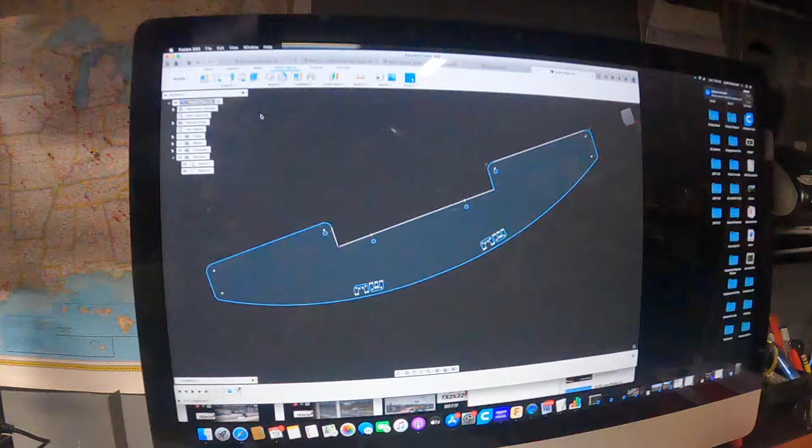So we got to make a weight plate for the Smurf. I drew this thing up, sat underneath with the tape measure - I don't know if you can see that well, I should do a screen recording but I don't want to. We're gonna send it over to my buddy Tegan, he's got some heavier plate and a decent sized plasma cutter, and we're gonna get her cut out.

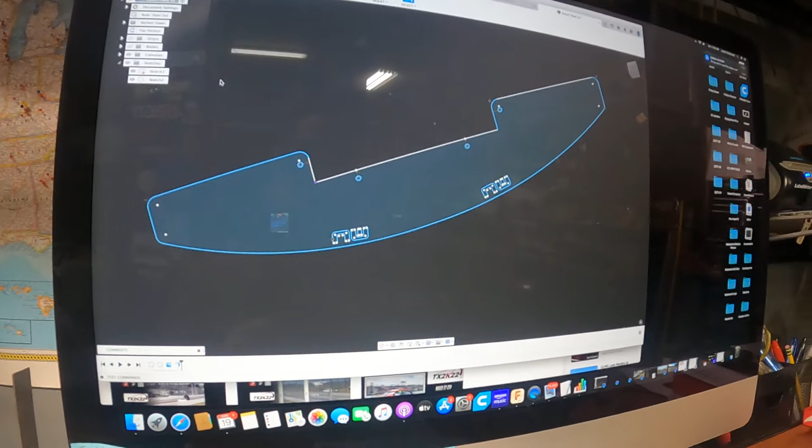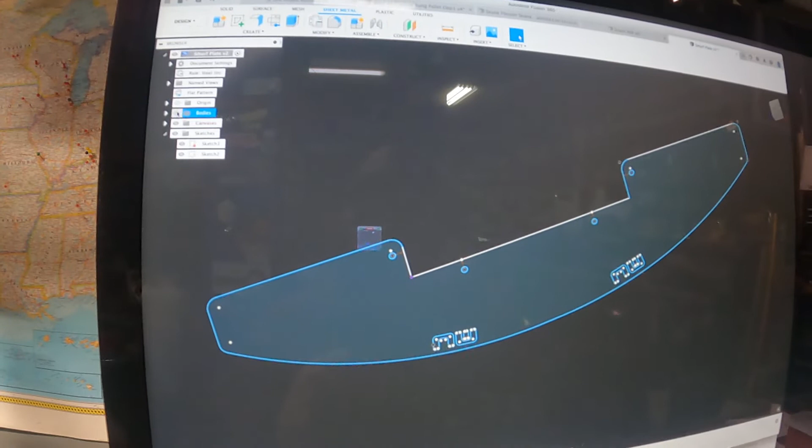So different from machining, actually working in sheet metal. I've learned that you do your drawing, you create a flange, not a solid body, and then from that you create a flat pattern, which seems pretty stupid, but once you create the flat pattern, click OK.

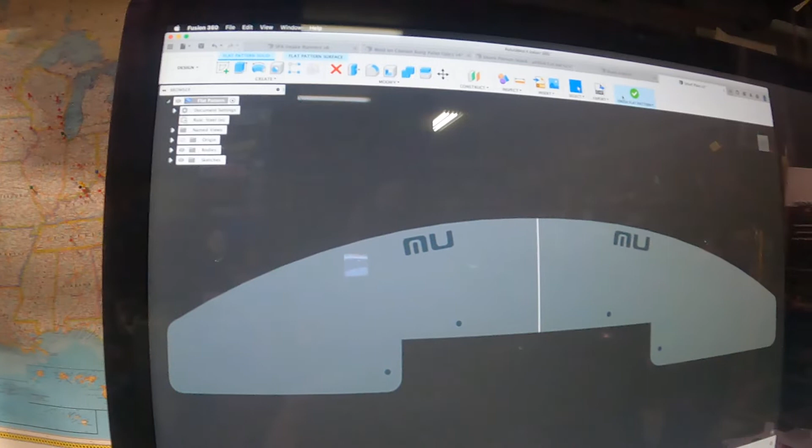This thing should pop up. Boom, flat pattern. Export in a DXF file. So I've learned if you do not do this and you do it in solids, it comes out misdimensioned when it gets to the laser cutter or the plasma cutter or whoever's cutting your sheet metal out. So export DXF right there if you're using Fusion 360. If you do it from over here, export DXF from file in there, it does not work. Anyway, I'll see you over when we get to Tegan's shop and cutting this bad boy out.

All right, so I sent those files off over to Tegan at Strife Manufacturing, and here I am. Got some people over here doing some seat work. Got my beverage.

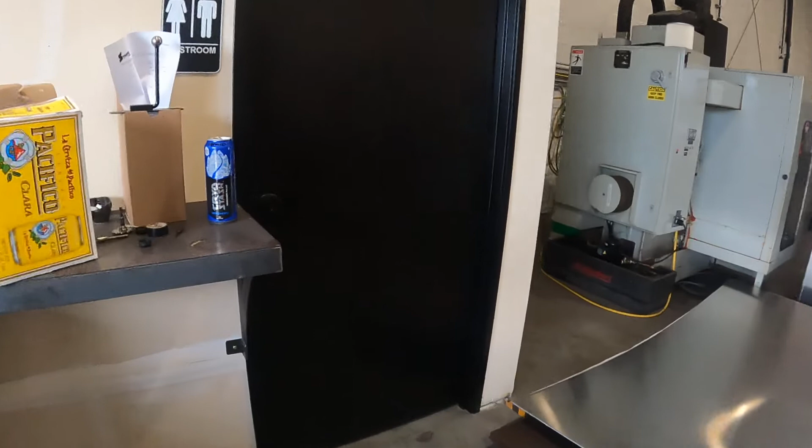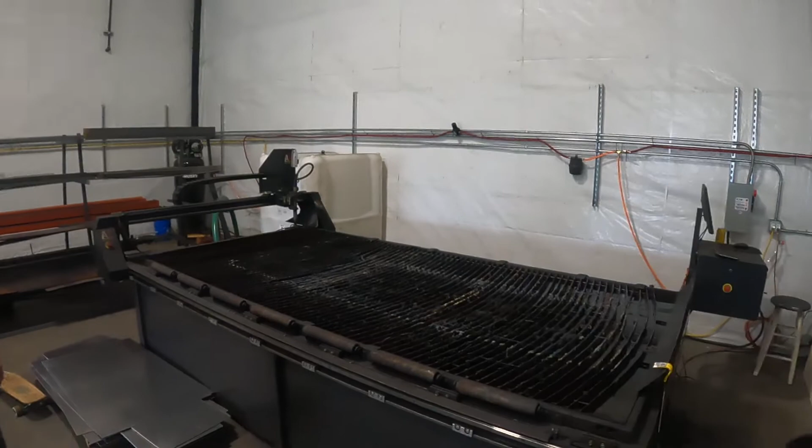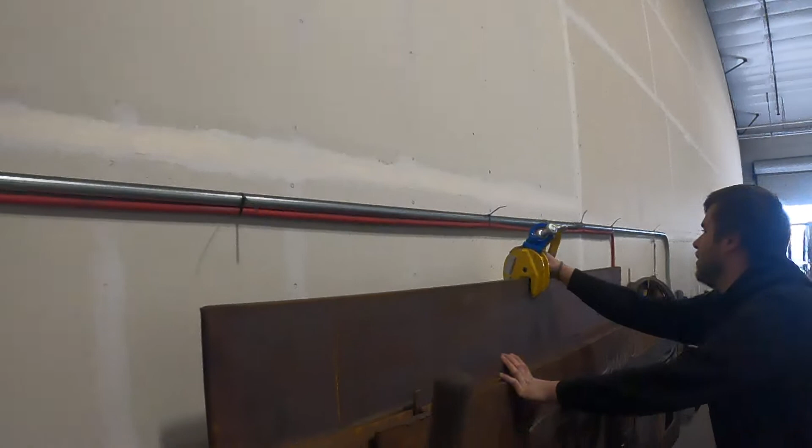All right, so Tegan picked up a plasma table, 5x10, last summer. He's been burning plate for a lot of local people lately, just tearing this thing up. I drew the files up, sent them over, and he's got some material sitting over here. We're gonna load up and get cutting on this guy.

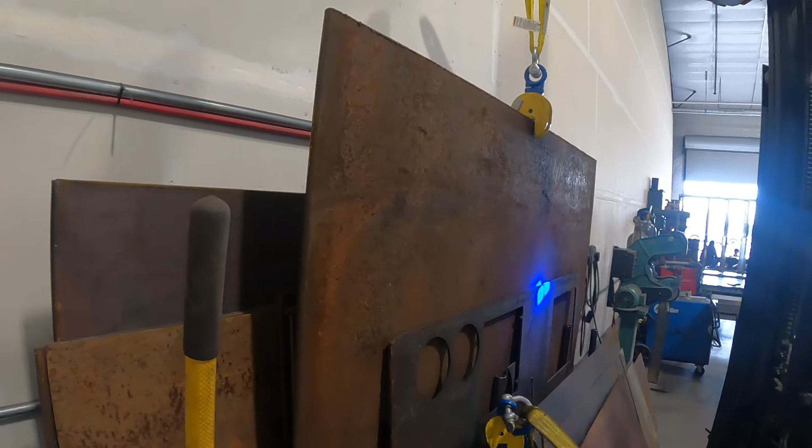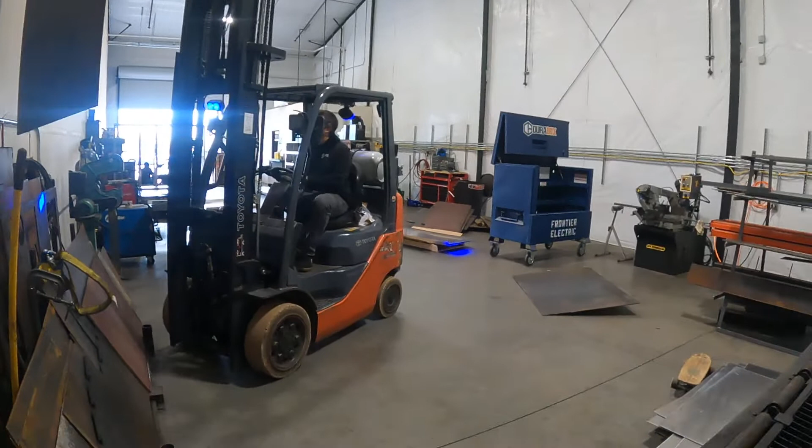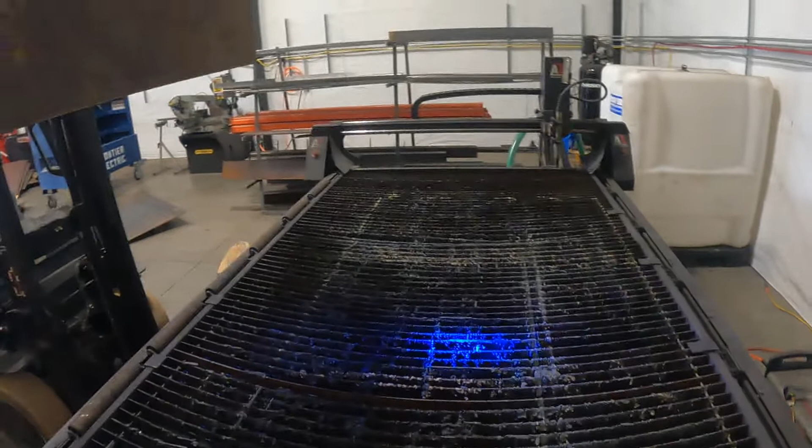Do you go far and then come back? Yep. Okay. Yeah, you might just have to square me up. Yeah. So he's got stoppers over there on that side, so he's going to come across. We'll set it down over there, and then he'll pull it backwards with the forklift.

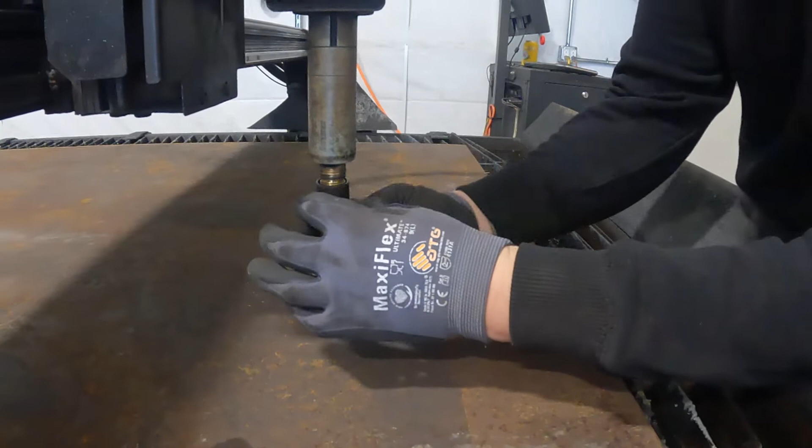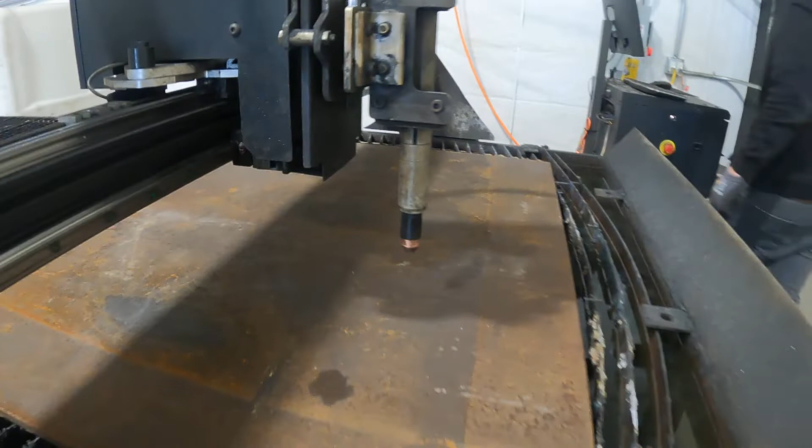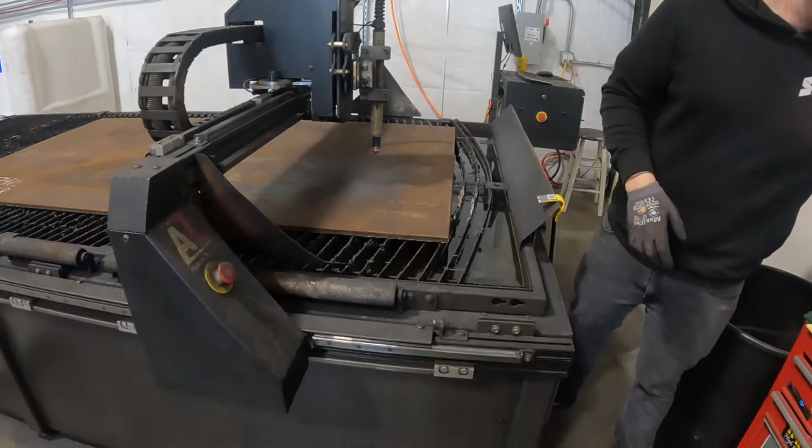Run anti-spatter on here, basically just for the arc, when it arcs. It keeps the sparks from building up on it, and your consumables will last longer.

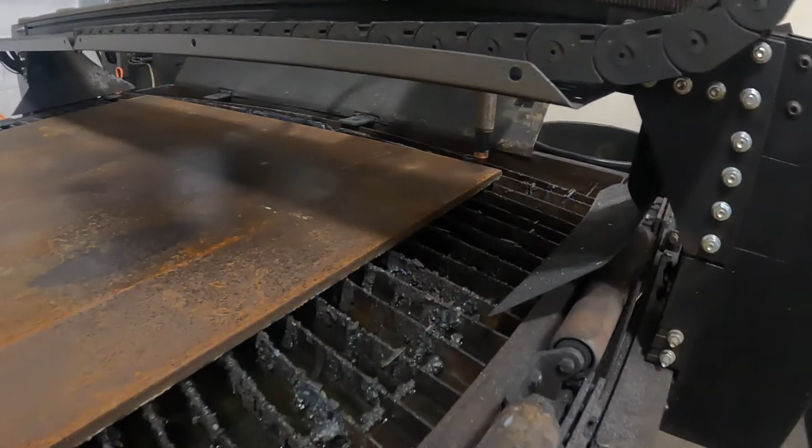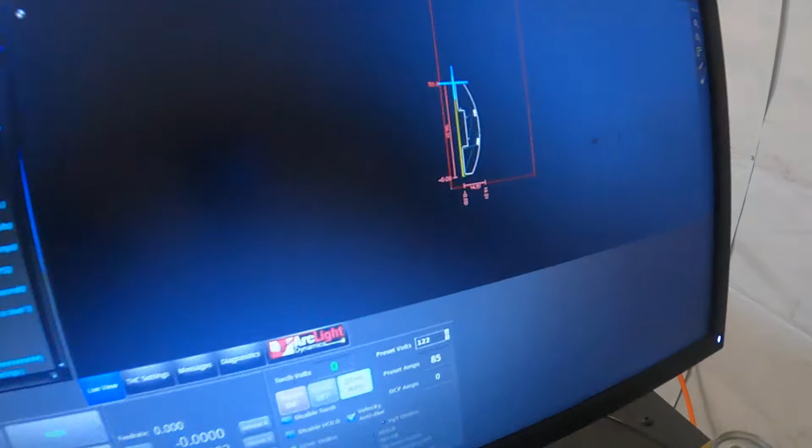Test run, no cut, I'm just making sure I'm on the material. Yep, okay, you ready? Yeah. Glasses, please. Terry, you want to run it? Go ahead, dude. Here, let's just get a shot of this. Go ahead, you can hit the button, dude. So you hit run and then resume. Let's spray this down - what's resume doing for me? Resume - so you hit run and then you need to hit resume to start it. Got it.

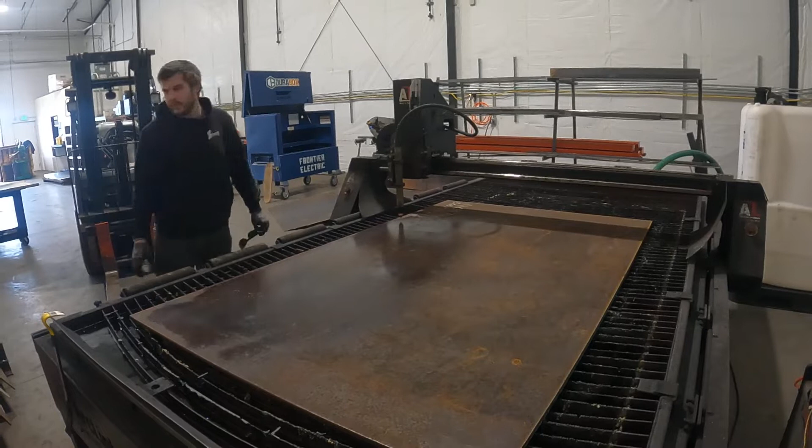This will just help get really nice pierces. Alright, hit it, ready? Oh fuck, get spoiled with my touchscreen.

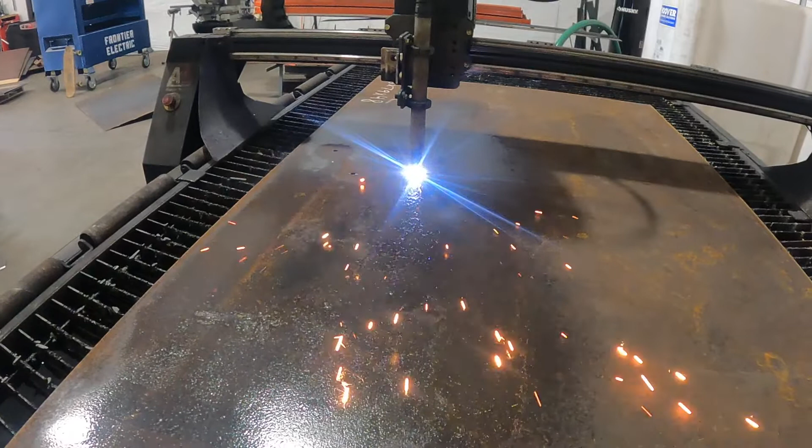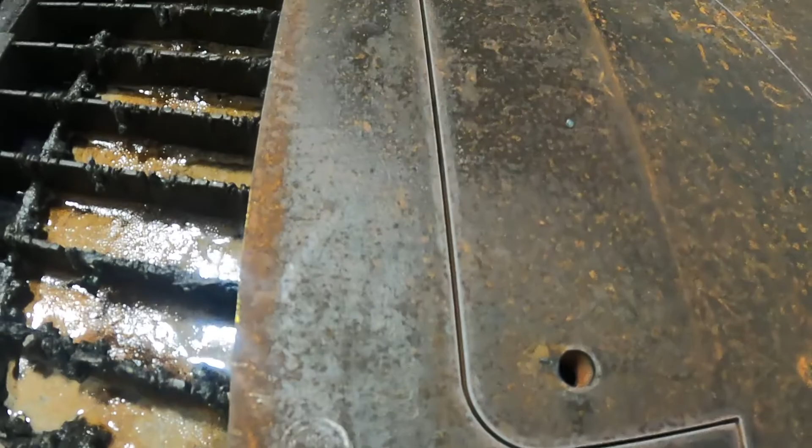A lot of people don't know the difference between laser, water jet, plasma, torch, all kinds of shit. There's just a whole industry of stuff that you don't even know about until you're exposed to it. Lasers are really cool, they serve a purpose. Plasmas serve their own purpose. Big flame cutters serve a purpose. Water jets serve a purpose. And you just get what your jobs need, and they're all really damn cool in their own way. So this is good shit to be checking out.

Camber plates - I only need 2, but I'm probably gonna mess one up when I go to bend it tomorrow, so he's gonna cut me 4 out of what he's got here. Basically we need to cut the front suspension off the Smurf and do a few modifications that we've been wanting to do for a while, and we're gonna get to it tomorrow.